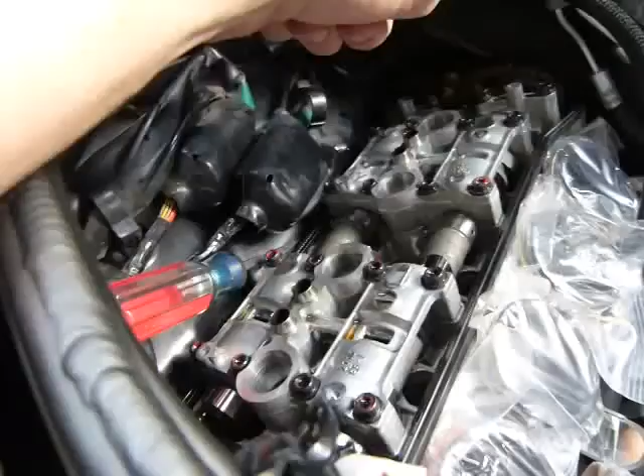I have removed the cam cover. I am ready to do my valve specs. Although I don't see the valves, you check a gap between the cam lobe

and a push plate underneath, which is an upside down bucket. To do this, there's your upside down bucket. It's kind of hard to see because I haven't taken it apart, but it's down there below this cam. This is the cam lobe, and that's the entire cam profile and cam mechanism. Same idea

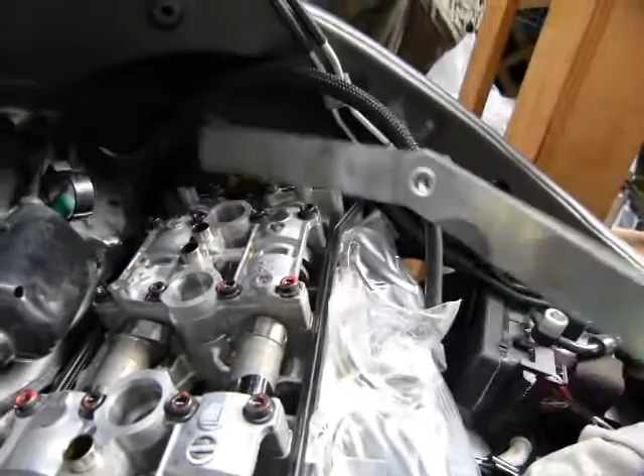everywhere. So to get started, what you need is your valve specs. You also need a feeler gauge like this one, and it opens into leaves. It's very oily, I want to touch it last, so I can do this shot with clean hands.

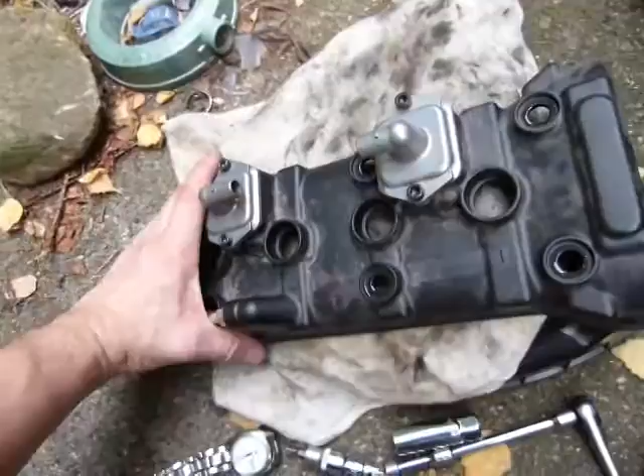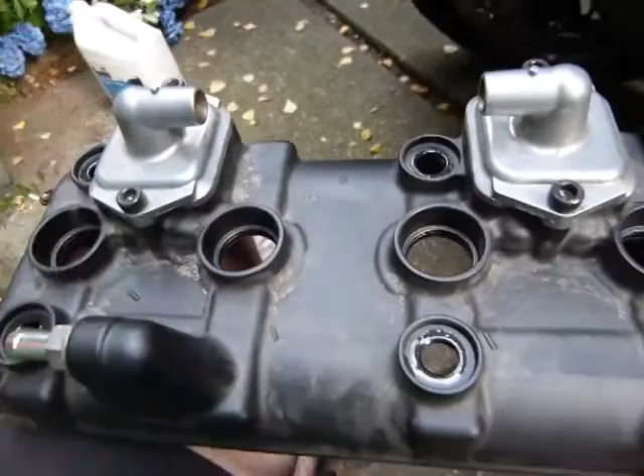To remove this cam cover, that was first. Here is the cam cover, and there, that's how it looks like. Fairly lightweight, it just has some vacuum hoses on it that were disconnected earlier, and I took out the spark plugs because it's easier to position the cams that way, since there's less compression in the engine. So 6 bolts come out. 2, 4, 6. Those ones come out, and then this one - that's how it looks like on the inside.

Don't lose these little gaskets also, okay? That's also part of the deal there.

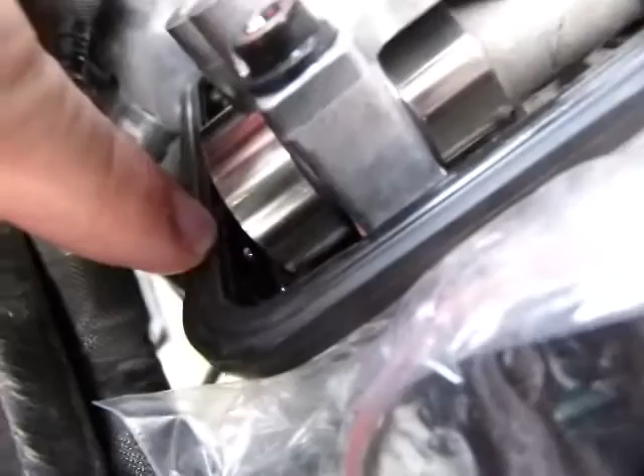When you remove the cam cover, you've got this seal here - that's the profile of the seal, okay? And here there's no silicone on it, but there is some silicone around there where there's this deeper part to it. So if I lift it, the silicone kind of starts there. I don't have silicone, I don't want to take it off, so that's the idea, okay? Just put it in place. That's how it looks like.

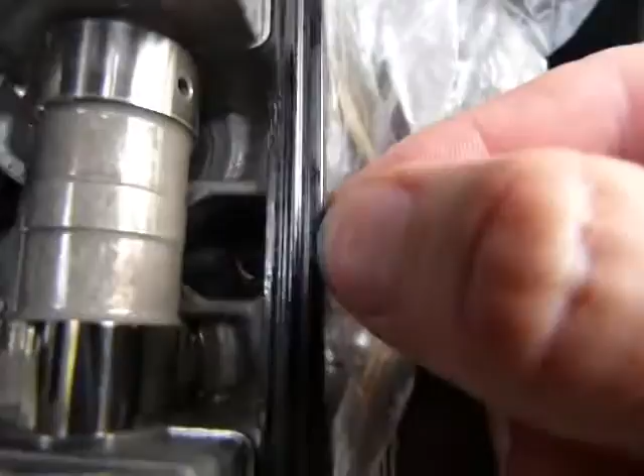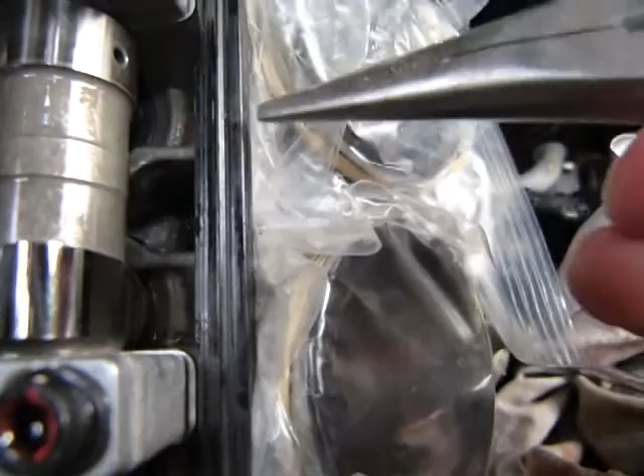It was dirt covered for its outer half. You can see there's a rib on the middle, so it was covered halfway through with dirt. From the edge to the rib, it's keeping the dirt out very successfully. But I took good care to wipe it away, just like so, with an oily rag, because I don't want the abrasive dirt particles - sand is very abrasive, like sandpaper. I don't want any of them inside the engine. Everything here is extremely finely machined to a mirror polish. I don't want any dirt particles in it.

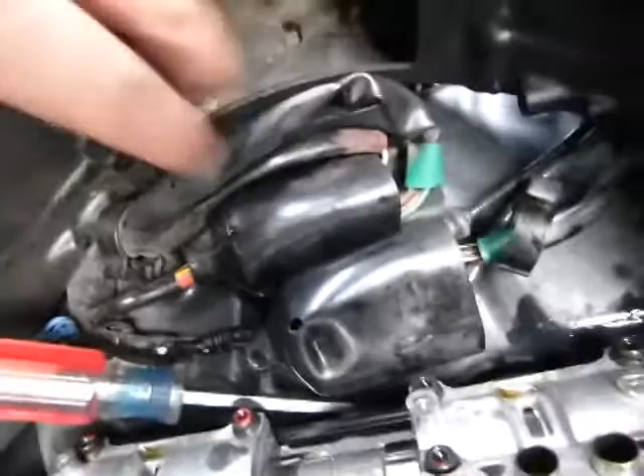A lot of dirt could get into it from this plastic tray here, because I don't know if you can see it - not really. Well, this is the top of the radiator, and you can see the light through, and it was full of stones and pebbles of all kinds and all sizes, all of these and everything.

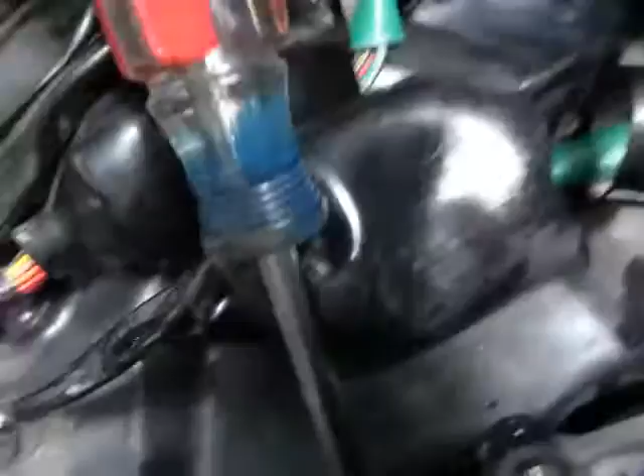So all of that had to be kept clean. That's why I have this cute little screwdriver inserted in here in such a position so as to enlarge the gap, so all the dirt and little stones can run out and down where the exhausts are. The exhaust - there you can see exhaust components there, exhaust pipe and exhaust bolts there, and the little stones can drop out there and be gone.

Okay, what else did I do? So this one's in place, and I also removed the clutch cable. I'm going to put it back together. I'll show you how it's done in the next video.

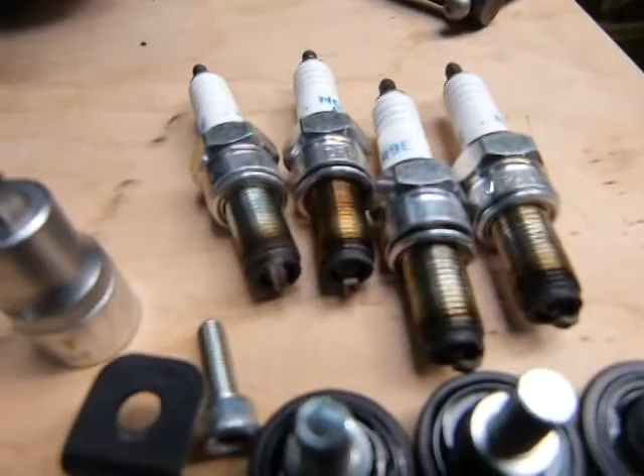So the cam cover is good to go for cleanup. Spark plugs have been removed. Yes, here is everything, that's how the old spark plugs look like. They are pretty dirty, and this is my first valve check.

Service as needed, adjust as needed. So I have 12,000 kilometers on the bike. That's how the plugs look like, ready to be changed.

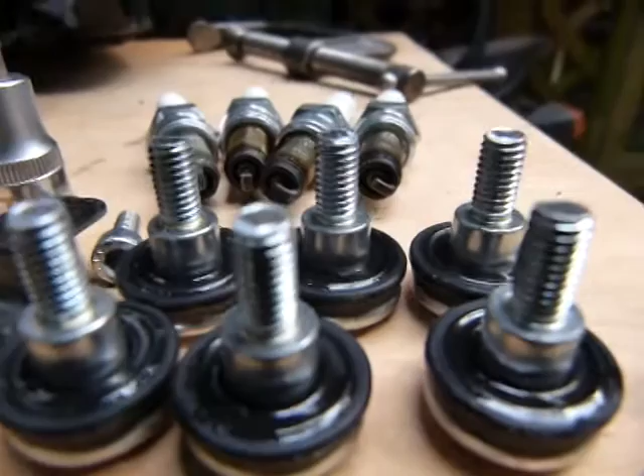And I have these cam cover bolts. Alright, you see there is about 9 or so full turns of thread on these cam cover bolts. Let's see if I can focus on it - not really successfully, it's kind of small. Maybe if I put my finger next to it.

That way, not really. Well, anyhow, you have about 9 turns or so to go, and they don't need a whole lot of torque. All you need to do is compress that rubber seal a bit to keep the oil inside the head. Just compress it lightly, very little torque, okay? And if you rotated 9 times fully, you're bottoming out, okay? Don't force it. I have broken cam cover bolts before. No fun whatsoever, no fun. Don't do it, don't break them, okay? Don't over tighten them. If you just compress the seal lightly, you're good.

Same on this head gasket, which is meant to be reusable. Just compress it lightly with those bolts as you snug them in, and you're home.

Why am I doing this service on my own, alone? Excellent question, I'm glad you asked that.

What happened before is that in this cam holder assembly here, bolted down with these black bolts, some apprentice—not on this bike, on a previous bike like my V-Strom—ripped out the thread from some of these holes. At a brand name dealership, I ended up paying for helicoiling these pieces, being sent to a machine shop, and it was also no fun. That's why I'm not giving it to any incompetent apprentice at any dealership. Sorry fellas, experiment elsewhere. I do my own work. You learn on your own bike at your own cost, not stripping my threads out.

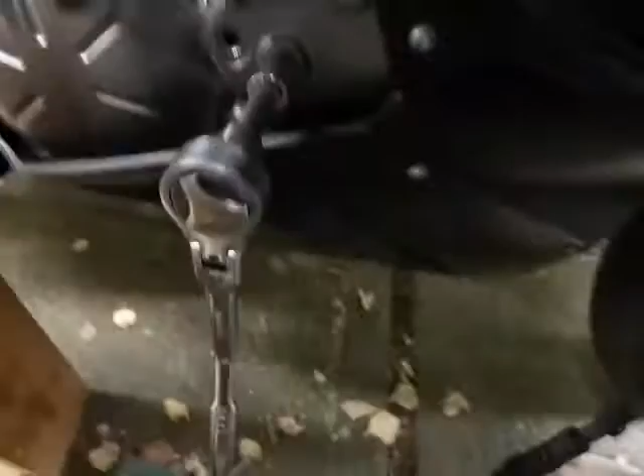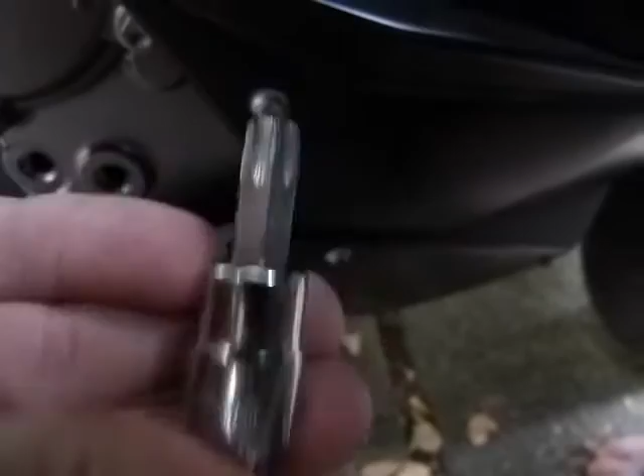On the other side, you need one more thing. You need to rotate the camshafts somehow, and you do that by rotating the crankshaft, which is an extremely good design. No need to reposition the body panels—these cute little plugs come out with a screwdriver, hopefully, and you need to insert a Torx 50. There you have the T50 wrench, just like so.

That would be Torx 50. I don't know if we have enough light for this—if we don't, let me reach for my flashlight. There we go. There is the Torx 50. Through this hole you can see a gear, a big gear at the foreground, and there's a rotating plate behind it that you can't really see because I'm not rotating anything. But that rotating plate behind those gear teeth would mark the top dead center position, but you don't need it, and I'll show you why.

Because it's really hard to see. Let me just make sure this one is on. There, good, I just moved the cams a little bit. Okay, I'll show you what I do here.

So the measurement takes place between the cam and the bucket underneath, with the feeler gauge. I'm going to put you on this perch here and have a look-see. Yep, that's about as good as it gets. Alright, the feeler gauge—I'll get you the valve spec numbers in just a jiffy.

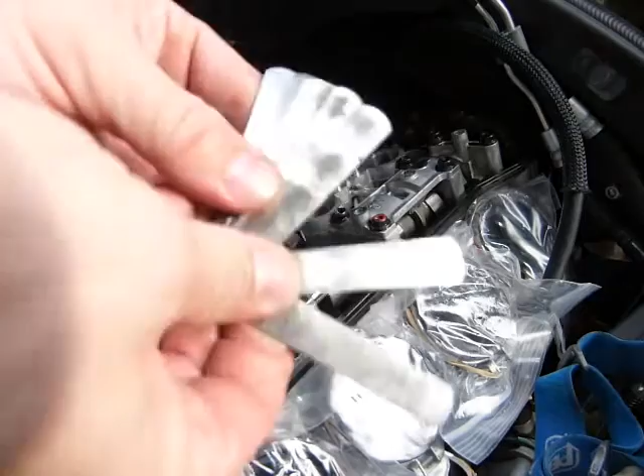This is how it goes. I have, let me see, that's intake, so that's 5, 6, and 7. So I'm going to choose out of these leaves 5, 6, and 7, and also 8. 5, 6, 7 is my spec, and 8 is over. So first, 5, 6, and 7 are acceptable. These are thousandths of an inch—I know it's a metric bike, I'll show you everything in a jiffy. This is 8 thousandths of an inch, which would be too thick, meaning the shims need to be adjusted.

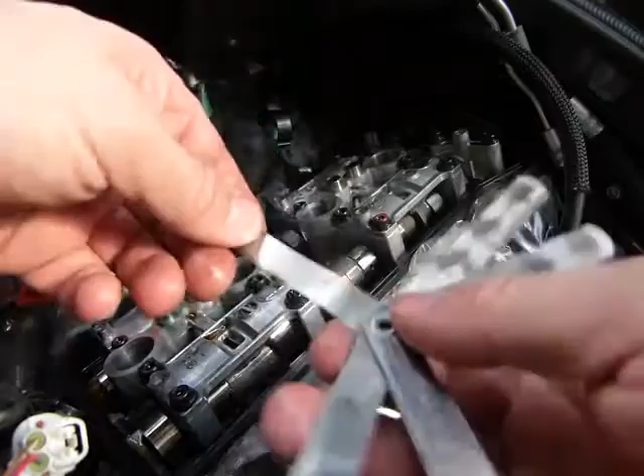So let's see if the 8 thousandths feeler gauge fits in—try to insert it, and alas, it does not go in. So the gap is thinner than 8 thousandths of an inch. Next is 7 thousandths of an inch, let's see. Well, that runs in, and in so much so that it comes out on the other side. You can see it runs clear through, while the 8 thousandths did not go in. Alright, I don't want to get my hand oily. So the name of the game is find the thickest one that fits through the gap. Okay, so that's one of them.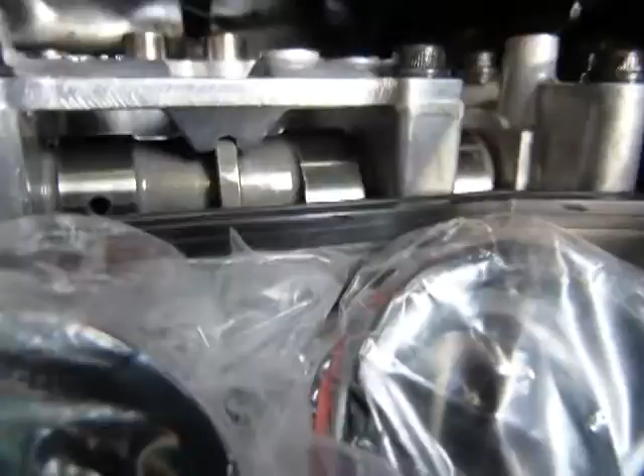You have 4 cylinders—cylinders 1, 2, 3, 4—intake ports, but you have 16 valves. This is your intake shaft, that's your intake side, that's your exhaust side, and your intake camshaft. So you have your intake specs applicable to this row. The first 2 cams are for cylinder 1, the second 2 are for cylinder 2. This is not the ignition sequencing, I'm just numbering them: cylinder 1, cylinder 2, cylinder 3, and cylinder 4, from left to right. Same for the exhaust, but it's really hard to get the camera in there, such a tight space.

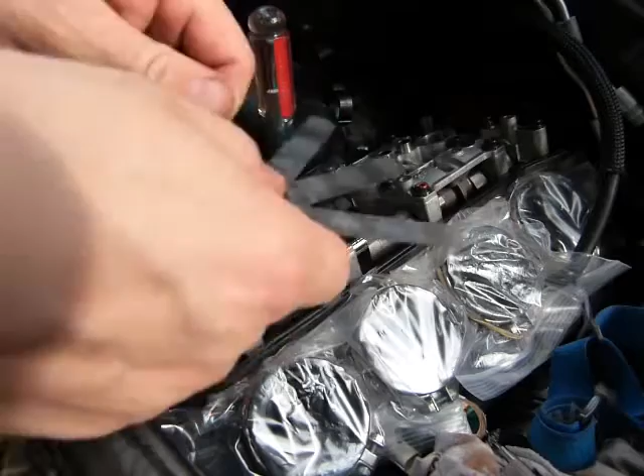Okay, get back on the tripod. So the name of the game is find the thickest feeler gauge, the thickest piece of metal that you can jam into that gap. The 8 thousandths was too thick, 7 thousandths was good. Just in case you didn't catch that, let me show you another one. Let's see, that's 8, 9, okay. Let's see this one next to it.

8 thousandths doesn't want to go in. Let's see the 7 thousandths - I'll explain the numbers in a sec. 7 thousandths just doesn't want to go in. Next one is 6 thousandths. Oops, I flipped it away. Okay, that's my 4, that's the 5. Yeah, that one, 6 thousandths. There, that runs in, wunderschön. That's in, alright? I'll show you the numbers.

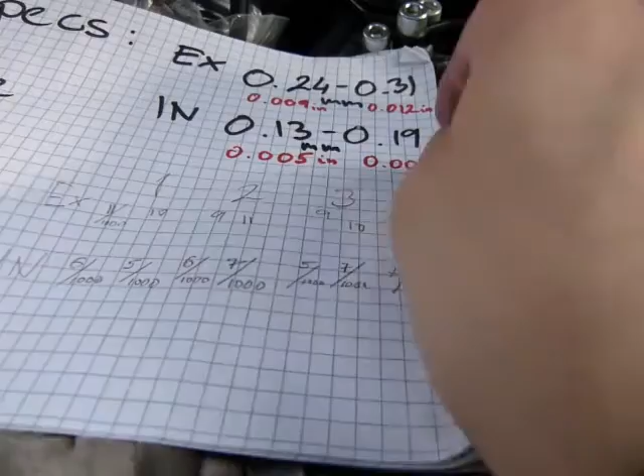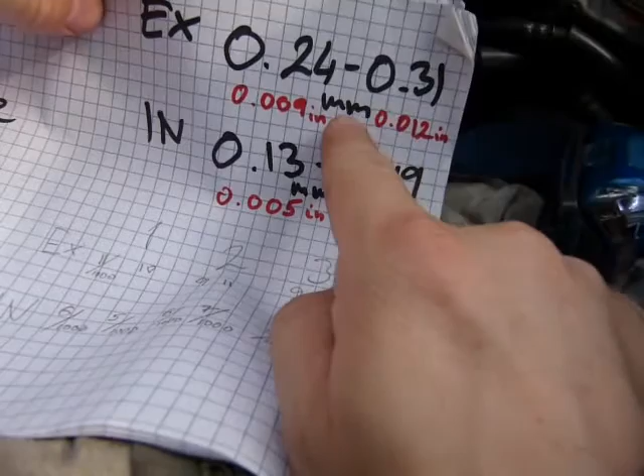We'll do a little geometry here. The specs are those numbers. For the intake side, you have black numbers, metric millimeters, 0.13 to 0.19 millimeters. Exhaust, 0.24 to 0.31 millimeters, metric. But on a metric feeler gauge, where is it?

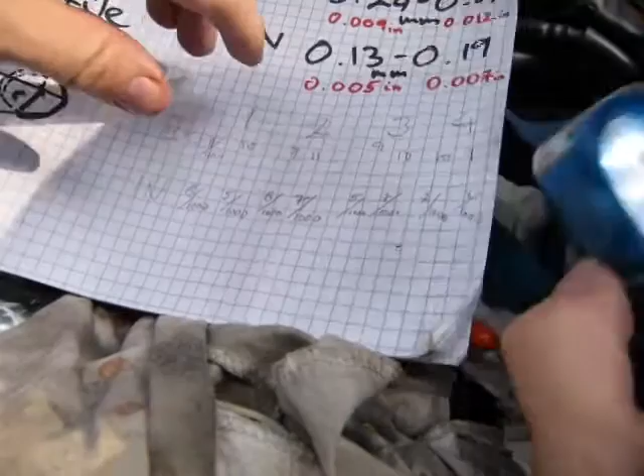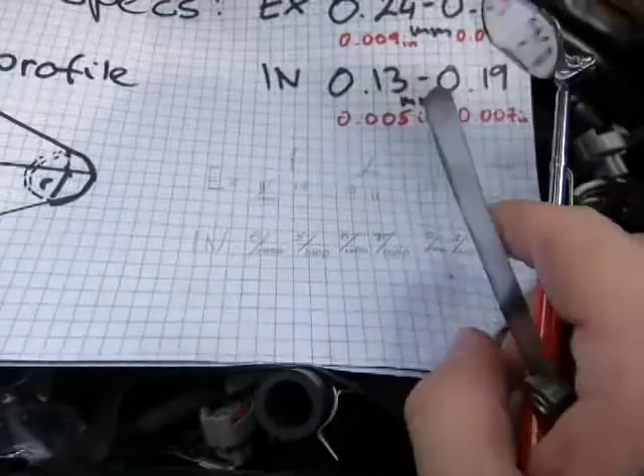I don't know where my metric feeler gauge is. You only have - because I ended up using the Imperial one. Sorry, a little disorganized, just a sec. Might be able to show you. Found it, okay, I just dropped it. There, here's my metric, look at the numbers.

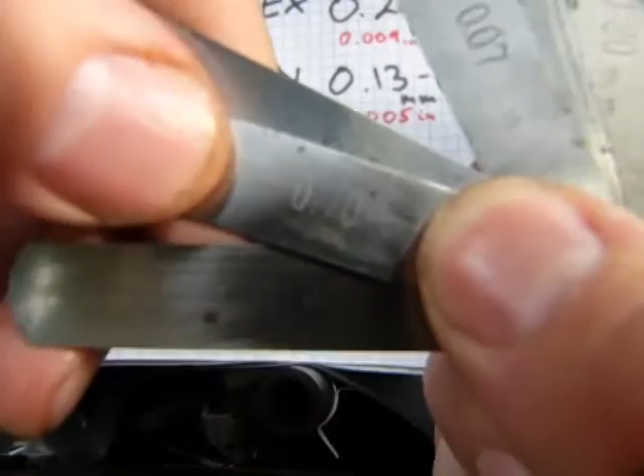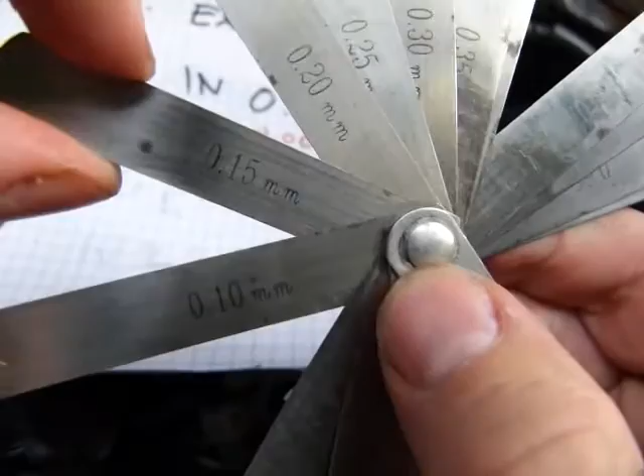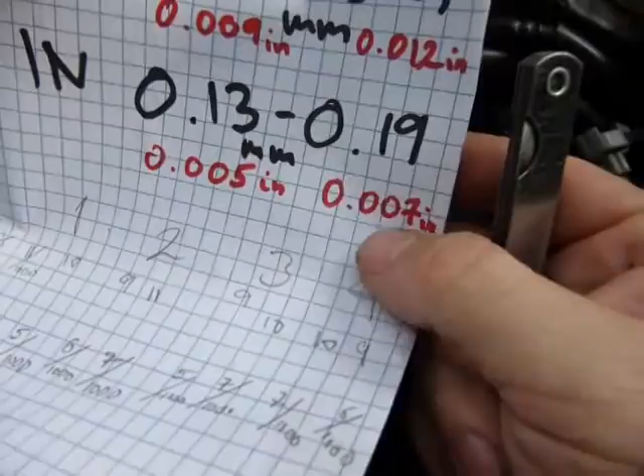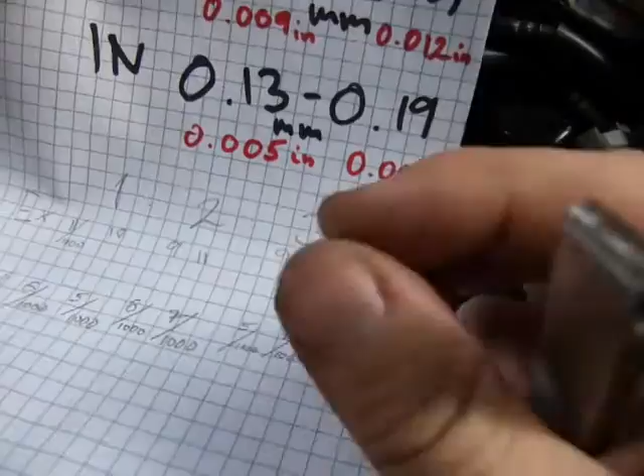This one, sorry, this one, the 0.15, because 0.15 is between 0.13 and 0.19. So this is nice, but it doesn't work as well as this one, because 0.13 millimeters is 5 thousandths of an inch, or 0.005, and that number is 19 hundredths of a millimeter is 7 thousandths of an inch. And on this feeler gauge set I have a 5 thousandths, a 6 thousandths and a 7 thousandths, so I have finer increments to measure. Alright, that's why I chose the inch based.

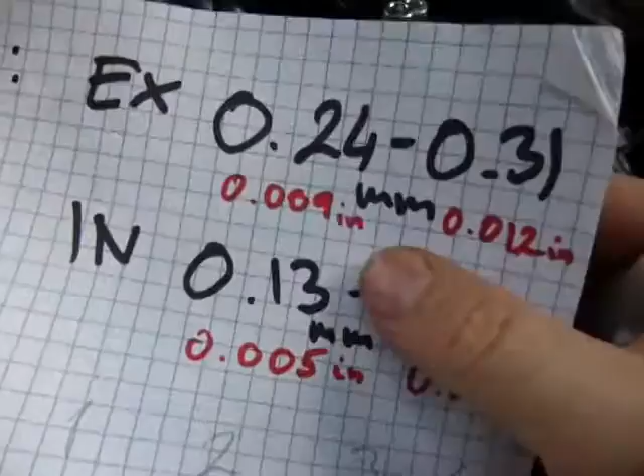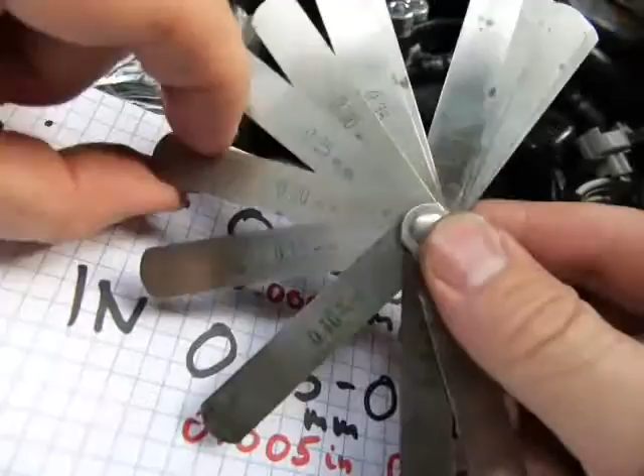Same for the exhaust. Between 24 and 31 I only have 25 and 30. That's two pieces of shims to measure with. Yeah, I have either 25 or 30 on this set. It's a very commonly available set. That's only two shims, I want a little more choice than that. I do have a 9th thou, a 10th thou, 11th thou, and a 12th thou. So I have a 9, 10, 11, 12 - I have 4 pieces instead of 2 to work with. That's why I've chosen to work with increments of inches.

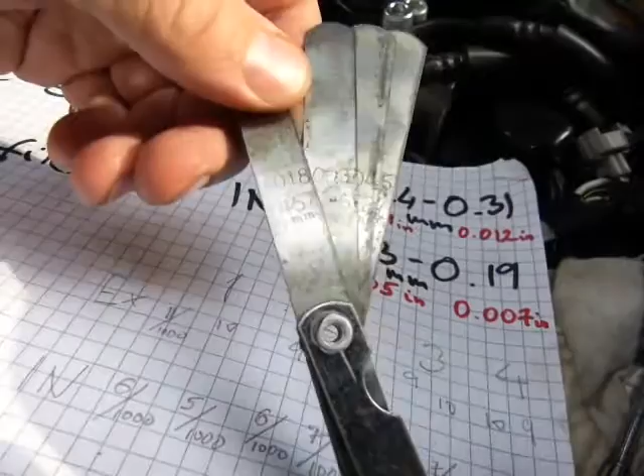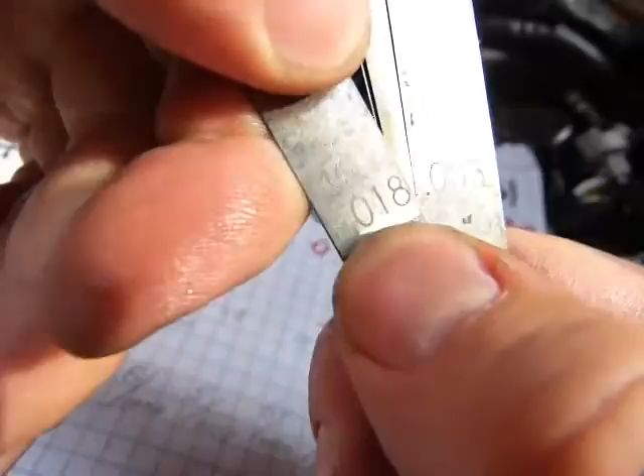On this set you can see it's calibrated both in inches - just wait for the camera to focus. Okay, there we go, I got the focus back. Sorry guys. You can see on this one it says 18 thousandths of an inch. That's not 0.18. In inches, only the digits after the decimal dot are written down. So that's dot, or 0.018, and there it is underneath.

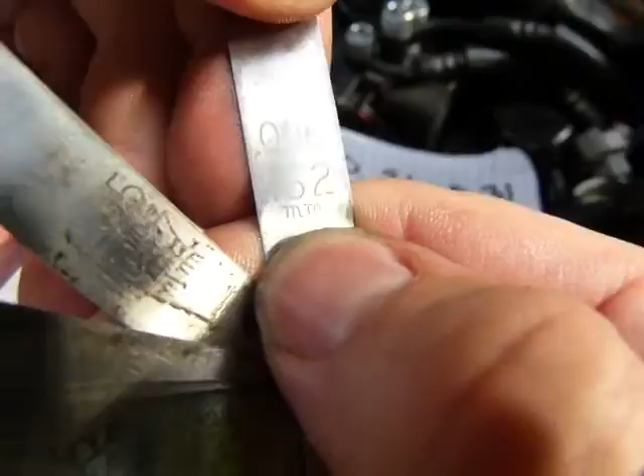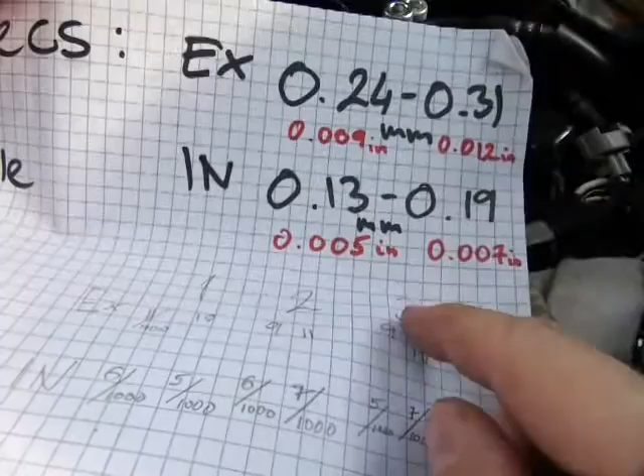It's in millimeters. So there is my 3, 4, 5. There's my 5 - you can barely read what its metric equivalent is, because some of them are worn more than others. There's my 6th thou, which reads 162, I think, or 52. Sorry, 152. So 5, 6. There's my 7, it reads 0.178 underneath in millimeters, but it's so faint - 178. Okay, but you get the idea. Whether you measure in metric or inches, it shouldn't make a difference, but I wanted finer increments.

This is what my measurements are. Cylinders 1, 2, 3 and 4 - 2 measurements for every cylinder for the intake, and 2 measurements for every cylinder for the exhaust. I started with the intake. Everything is in thousandths of an inch - instead of decimals I went fractions. Same thing, okay? So I measured 6 thousandths of an inch gap on that one there, and on the next one I measured 5 thousandths of an inch.

You get the idea, those are my measurements. 5, 6, 6, 7 - everything is within specs. 5, 7, 7, 6, and the same for the exhaust. 11, 10, whatever - you can see I have to be within 9 and 12. Everything is between 9 and 12. There, those are my numbers.

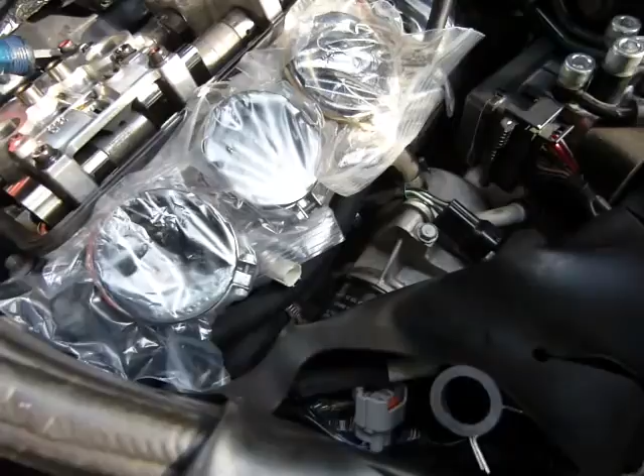So, lastly, cam profile. And why does top dead center matter? I'm not saying it doesn't matter - there's nothing wrong with setting it on top dead center, spot on. Good for you, bro, seriously, nothing wrong with it. I'm just telling you that there's an alternative to it that requires a little less work and a little less worrying, and it doesn't need your manual.

Look at the cam profiles. I'm going to take you off the camera stand. Look at the shape of a cam - you can see that it's like an egg shape. It's kind of smooth, it's got a big radius around here, and then it's extending in one direction, and it's got a little bit of a radius up top there. Okay.

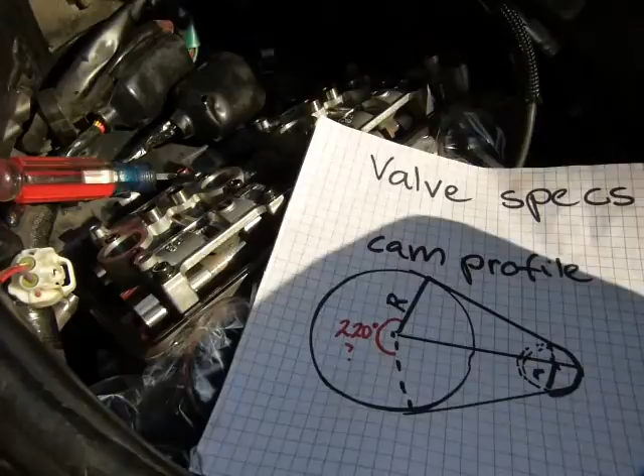So let's just get you back on the tripod, and this is what I have to say about the cam profile. Why top dead center is nice, but it's not necessarily - not necessarily - strictly applicable. Okay, let me explain. So here's your cam profile. On the cam profile you have a constant radius for most of the turn.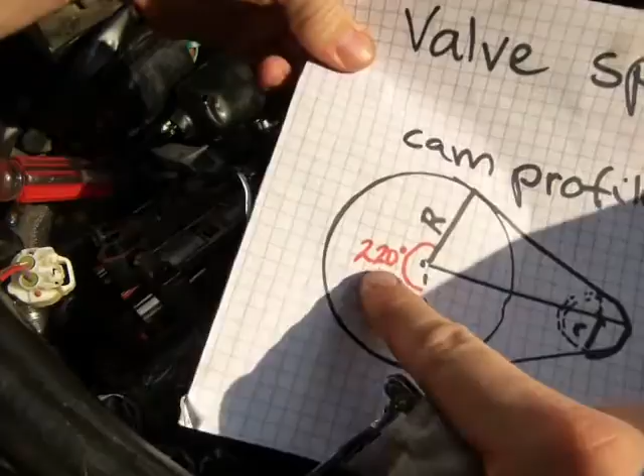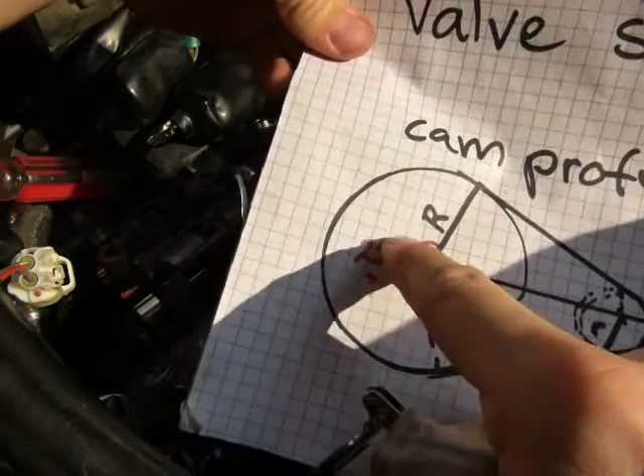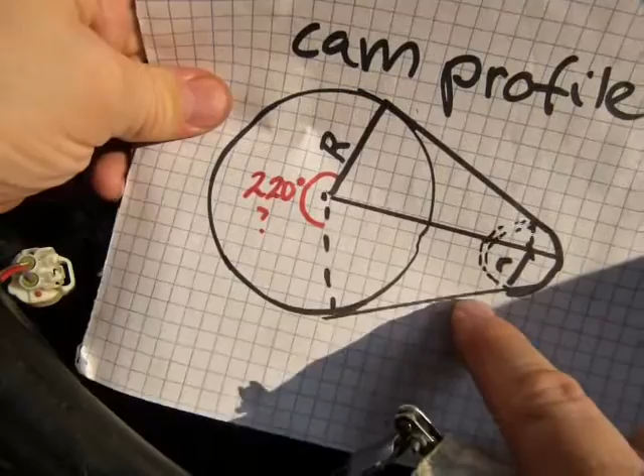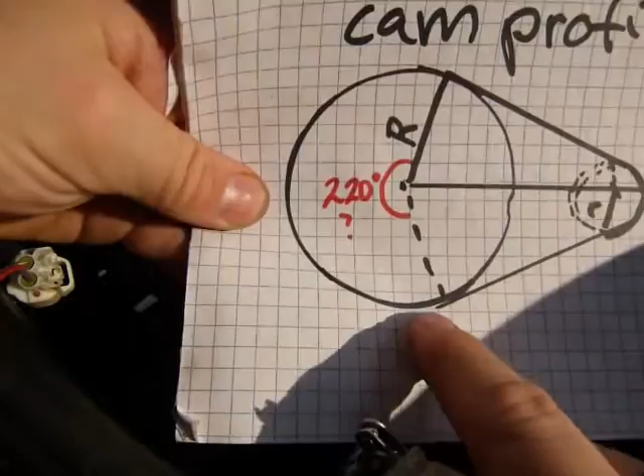Say about 220 degrees, for most of the turn you have a constant radius. Whatever the radius, it's the same radius there, there, there. From then on the cam lobe starts forming and the metal extends in one direction, and then you have a smaller rounded over part that also has its own radius, with a constant radius there as well, and an included angle on that side as well as the other.

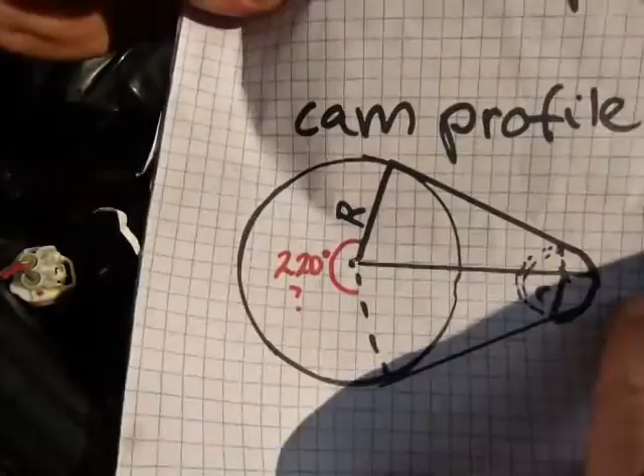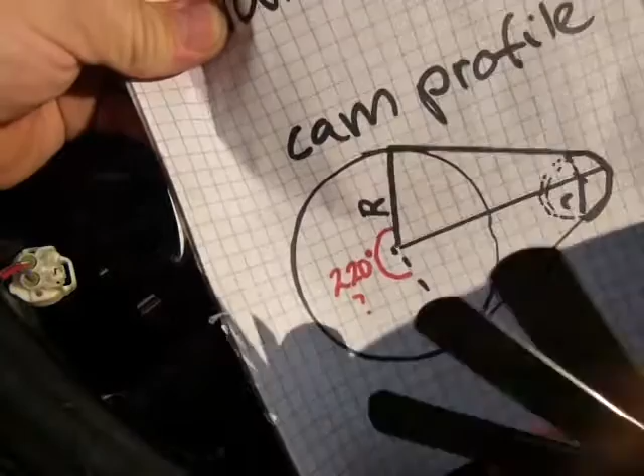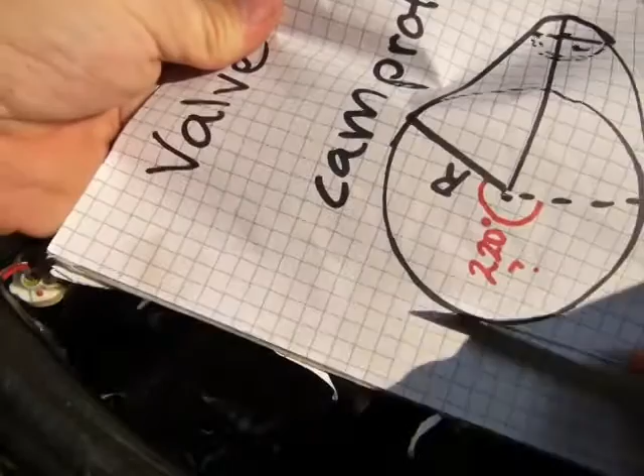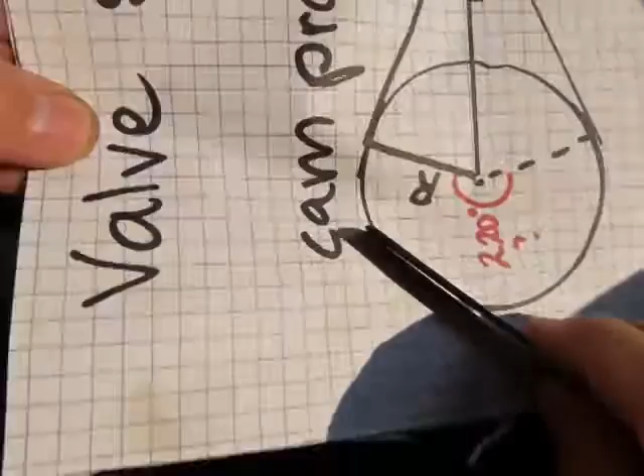If you are confident about experimenting and worrying about the sequencing of it, you can do this freehand and just eyeball it, and that's due to the cam profile. It's a very meticulously made mathematical shape. You can check into how cam machining is done. It's really fascinating. It doesn't hurt you, bro, to do a little geometry.

So that's why, even though this cam here is not entirely sticking vertically up, I measured the gap underneath, because it's in a position that is not gonna change the amount of gap underneath. Alright, I hope that makes sense.

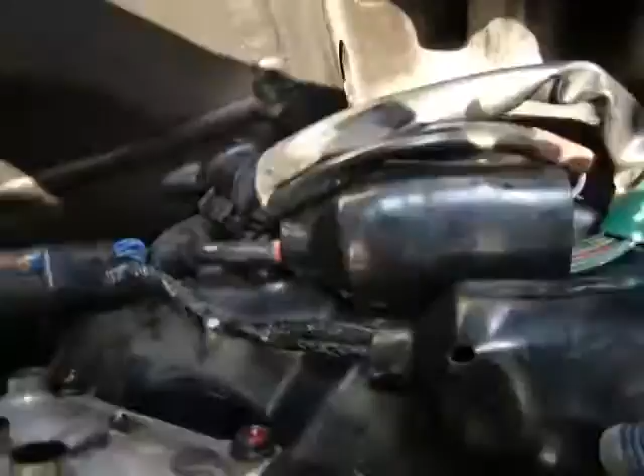Now lastly, the measurement at the front is really tricky. I will try to position the camera somewhere here and see what happens if I try to measure here. I'll just show you some of the misery here, how this one works.

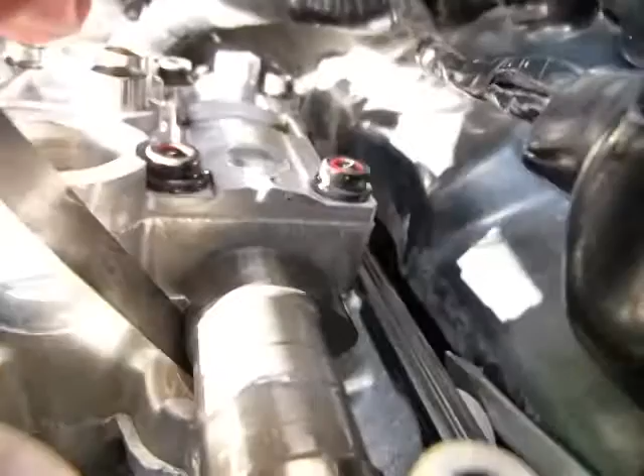Let me just get my feeler gauges for the exhaust. That's an exhaust valve, and I need to be within 9 and 12 thousandths of an inch. So I start with the 12 thou. Let me just put it there. Do you see that one? Not quite from there. How about this way? Okay, that seems to work.

The camera is inside the engine. I could rotate this one a little bit up, but that's how it goes. You try to insert the thickest possible gauge there, and I'm going to rotate the crankshaft just a little bit, to make sure it's not entirely top dead center, but it's good enough for a measurement. That one doesn't go in, and that was the 12 thousandth of an inch. It's just very hard to see it and read it.

Next one will be, I'm not trying to insult your intelligence, I'm just trying to save you some time. Here is the 11th thou. The 11th thou went under. It's already coming out on the other side. The 11 thou fits.

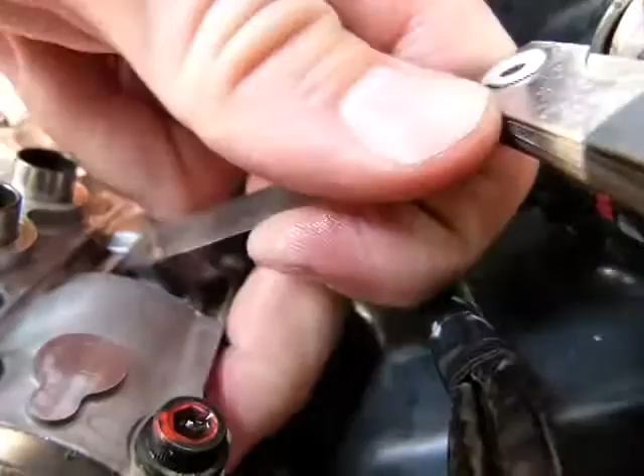Now from the other side, on this one, this is how it goes. I kind of have to have my finger along the cam here, guiding this one down, because I don't like bending the feeler gauge, and I'm trying to insert it there and trying to hold the camera at the same time. Yeah, the 11th thou just doesn't fit in there.

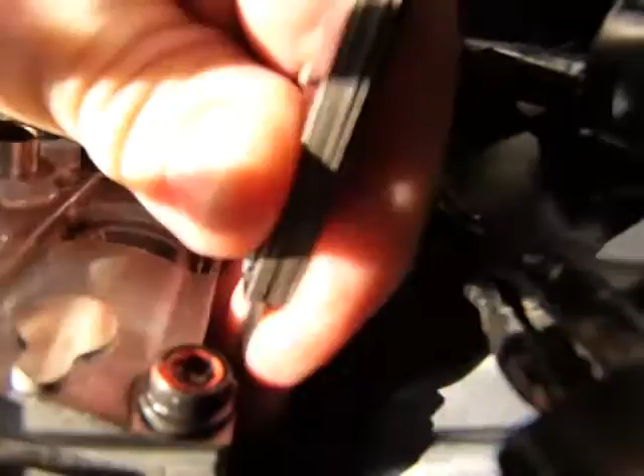So my next one is the 10. Just give me a sec, this is a really tricky camera shot. Here is the 10th thou. You can barely see the number on it. Let's see how it works with the 10 thousandth of an inch. That went in neatly. It's about that tight. That's how it looks.

And just pull it out without breaking it. That's how the measurement goes. I also have this little mirror so I can see that it's actually inserted properly and it's not going anywhere else where it shouldn't go. Alright, so that's how this one's done.

Nobody's stripping bolts out of this cam cover, and no apprentice is screwing up here. If there's any screw up happening, it's only me, myself and I to blame.